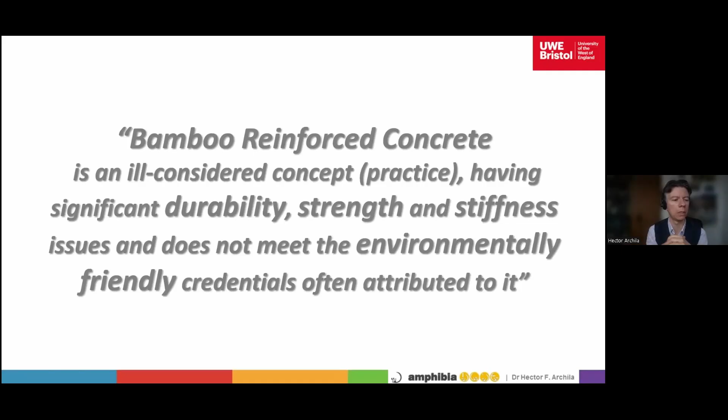It's probably a call to action to everyone participating in this event and all the people using bamboo, to stop using bamboo reinforced concrete. More details are available in that paper, and the video will go live on social media and other networks that INBAR has. So that's it for me.

Thank you. I believe Hector and Jan will produce more videos in coming years. Following this, we will have a new book release, the Bamboo Construction Manual for Single-Story Housing, produced by INBAR and the Base Bahia Foundation. Let's invite Luis Felipe to introduce it.

Hello everyone, thank you very much Kewei. Can you see my screen now? Yes, okay. As Kewei was announcing, we are very happy to share with all of you the new manual for construction of single-story houses made of composite shear walls. This is a collaboration between Base Bahia, INBAR, the Construction Task Force, and supported by the Hilti Foundation.

We have been working on this for the last two years. A lot of work has been done to make this manual possible, and you can see here the content. It discusses bamboo as a construction material, the pre-construction requirements of a composite bamboo shear wall house, the construction process, reference materials and standards, and some annexes.

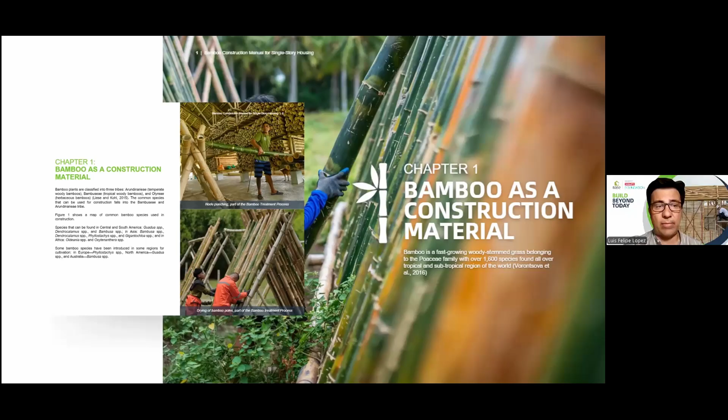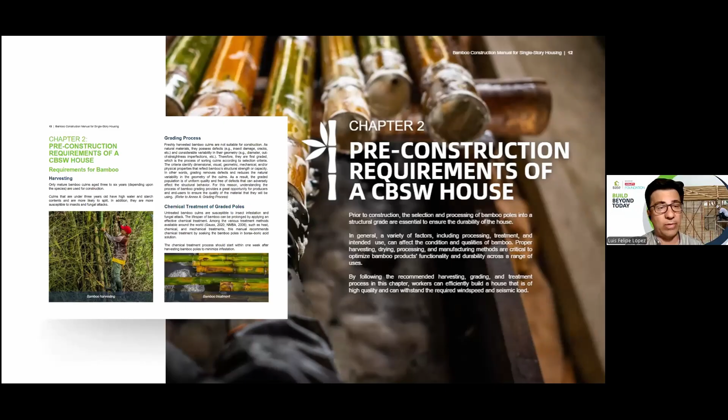In chapter 2, we present the pre-construction requirements of a CBSW house, and this talks a little bit about the treatment, the harvesting process, the grading of the bamboo, and the classification of the poles for construction.

Then we have an extensive chapter on how to build a proper house step by step, starting from the foundation of the house, the prefabrication of the walls, the installation of the components, the roofing components, and the finishes of the house.

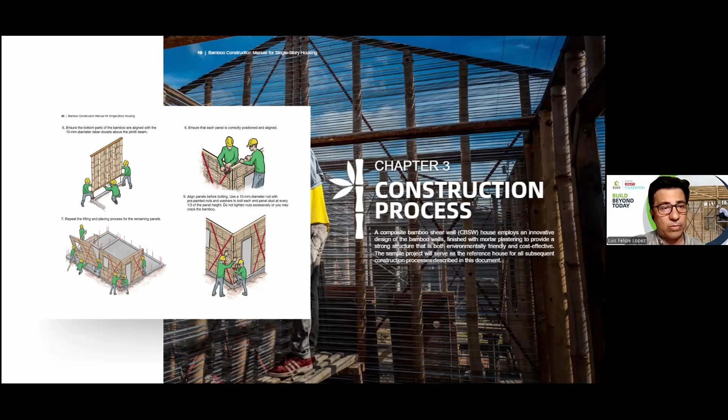It's a very detailed and comprehensive material that will allow many people around the world to build their own houses. At the end, in the annexes, we introduce a detailed house project that everyone can follow in their own countries, including the details for construction and foundation, and the prefabrication of the walls. It's a simple house that can be replicated, but also just a simple example to understand how easy it is to replicate this material.

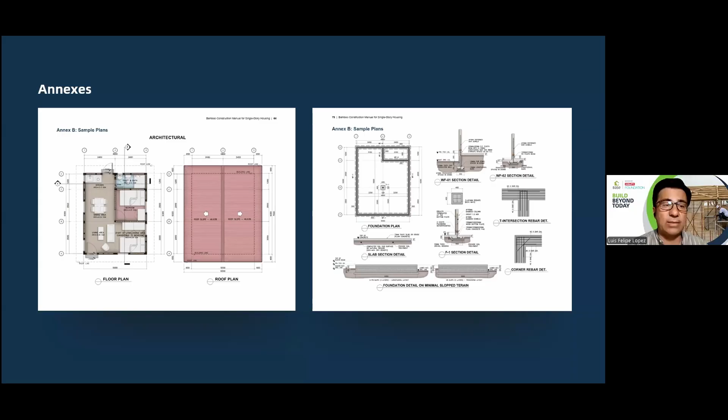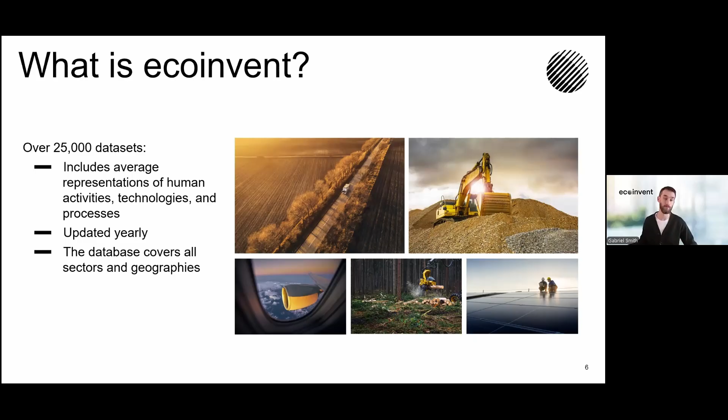If there were no dataset to use, they would just be guessing, and they might get it wrong. So if you want people to know that your material is more sustainable than a potential alternative, submitting data to EcoInvent is a very good idea. People trying to make their products more sustainable are using EcoInvent to compare different potential material sources.

So let's dig in a little bit for bio-based materials like bamboo. Bio-based means this is something that grew and then was harvested and processed. Agricultural crops and trees would also be examples. This is in contrast to something that has to be mined, like copper or iron.

When it comes to evaluating the impact of a bio-based material, there are unique considerations because the product itself contains carbon that was absorbed from the air and then turned into biomass. The way we handle this in EcoInvent is that the basic ingredients of carbon, energy, and water are represented as elementary flows. This represents the growth and photosynthesis of the plant as it builds biomass, in this example, the bamboo plant. Currently the water is contained within a wood flow, though we might change that in the future and represent it as an elemental flow by itself.

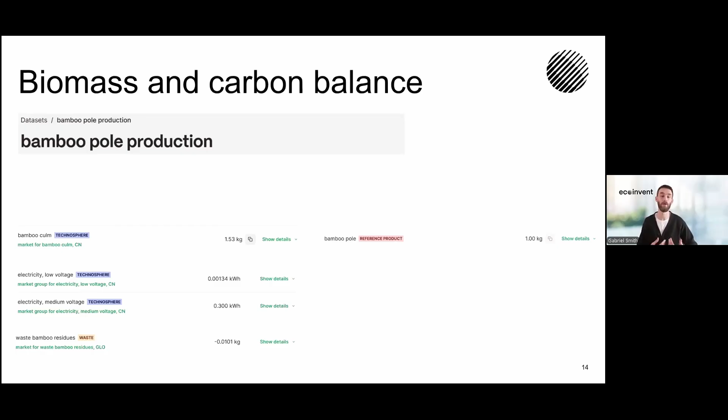Linking all of these datasets together enables us to assess impact using many different potential measures. So here, for example, using the IPCC 2021 method, we get an estimate of the climate change impact for this product. Specifically, this score excludes biogenic carbon flows.

That's the carbon that the bamboo plant is turning into biomass through photosynthesis. But there are other IPCC methods that include biogenic carbon flows. Specifically, inputs are counted as negative and emissions are positive. This is also called a -1+1 approach. And so in most cases, these should cancel out perfectly if you do an analysis that goes all the way from the beginning to the end of life for the product.

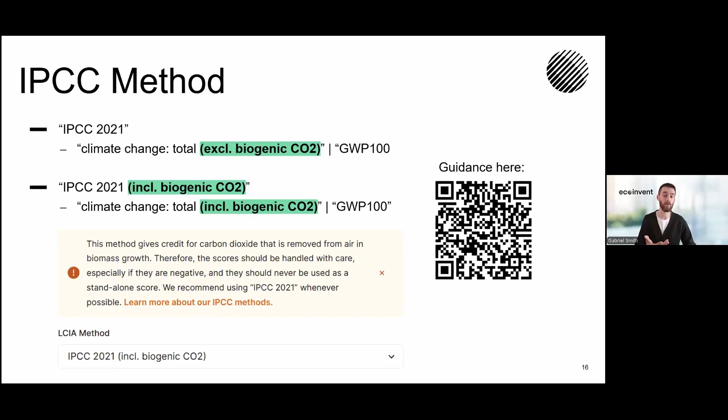But if you ever use this -1+1 method that includes biogenic carbon, or if someone else uses it and presents the results to you, you should compare those results to the ones that exclude biogenic carbon. And if the results are not the same, you should be skeptical and figure out exactly why they are not the same. There are a few cases where a difference is correct, but there are many where it would indicate that there's a mistake somewhere in the supply chain calculation, or you have an incomplete analysis.

So for example, if we include biogenic carbon flows for the bamboo pole dataset, we get a very different score for its climate change impact. And in fact, it's negative. As bamboo producers, we might be delighted to see this, but remember, we need to be skeptical if results differ from the other method.

So I wonder, can anyone tell me why the score is negative here? Does anybody have any ideas? You can just unmute and say something if you've got some input here. Nobody knows why the score is negative? I'll tell you if you don't know, but if you have some ideas, this is good too.

So the score is negative because our analysis does not include the end of life for this bamboo pole. We know the pole is going to disappear at some point. It's not going to last forever. And it could be misleading if we measure its impact assuming that it will. So it's important to proceed with caution if you ever use these include-biogenic-CO2 scores.

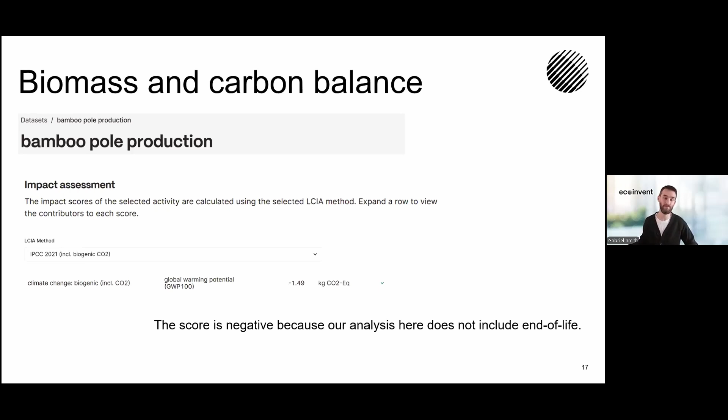In conclusion, these are the three takeaway points I want you to remember from this presentation. First, if you want people to know what the environmental benefits and impacts of your materials are, submit data to EcoInvent. Second, if you want to follow flows of carbon or other elemental flows through a bio-based product's supply chain, you can examine the properties and the elemental flows. And then finally, check results really carefully if you are doing impact assessment, especially around biogenic carbon flows.

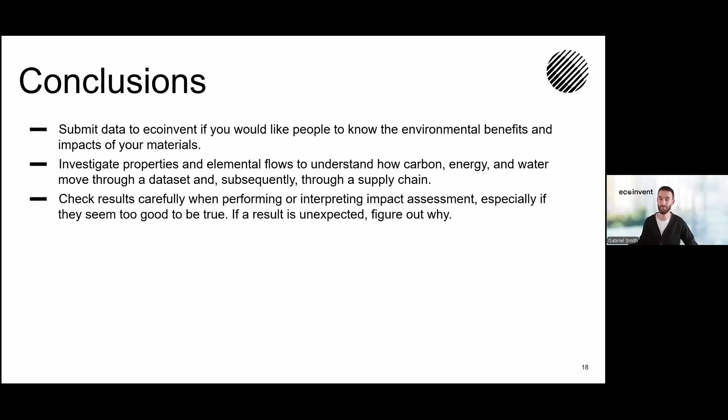Thank you. Thank you, Gabriel. Great presentation.

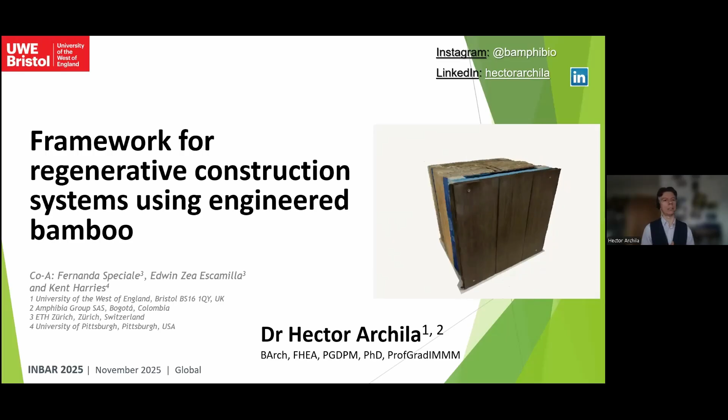It's a little bit of results from all that wonderful collaboration and that wonderful work that we do at our places of work, but also with INBAR and as part of the task force for bamboo construction, which aims to disseminate knowledge and raise awareness of how you can better use bamboo, and what are the latest developments in bamboo research. So what I'm going to tell you about is this latest work we have been developing, and it follows quite nicely from what Gabriel was saying in terms of LCA analysis.

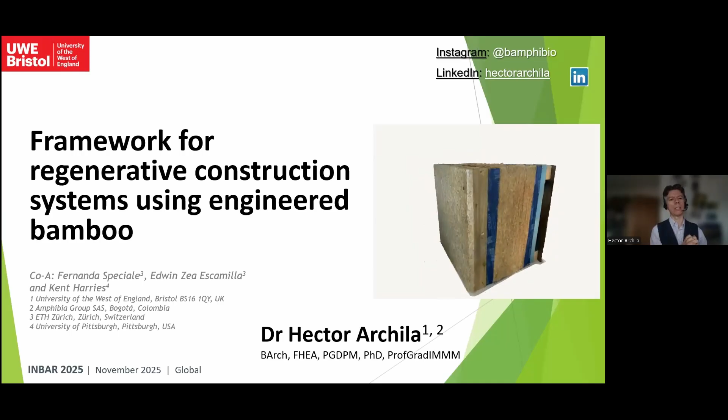Because what we are actually saying is it's really good to do the LCA analysis. We do need it, we do need to use it, but perhaps we need to also look at other impacts that construction and the use of materials have in construction and in the planet, in the global context. So you can see there some of the authors of a paper we published recently. You've got Fernanda Speciale from ETH Zürich, Edwin, who is here too, and we've got Kent Harries also from University of Pittsburgh.

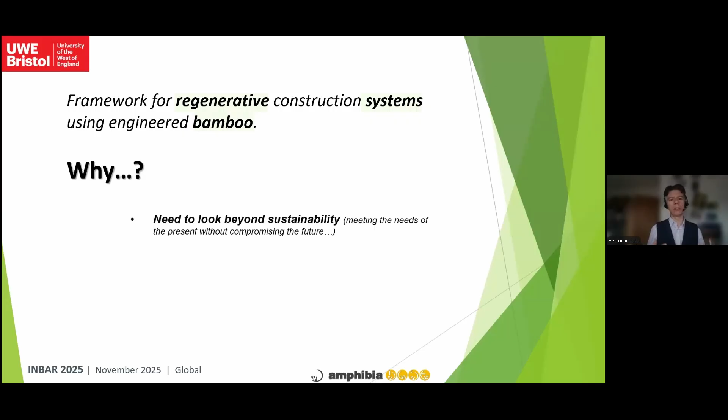So let me just tell you why creating a framework of regenerative construction and why using engineered bamboo. I guess the clues are in the title. We need to look beyond sustainability, and that's what regenerative construction, regenerative design is about - looking at not doing harm, because being sustainable is not enough. We need to look at how we can enable living and human systems to survive, thrive, and co-evolve, and how to repair the damage that we have caused already.

We know that human activities have created huge damage on the environment and on the planet. In construction, we have focused a lot on financial gain, and lately we have become a little bit carbon centric, so everything is put in terms of carbon. So we need to look at construction perhaps as a systems, in a systems thinking way.

And that means, and that we have done, is looking at construction in a systemic way, and at the impacts that construction has in a systemic way. So basically, it's something similar - to simplify it a lot.

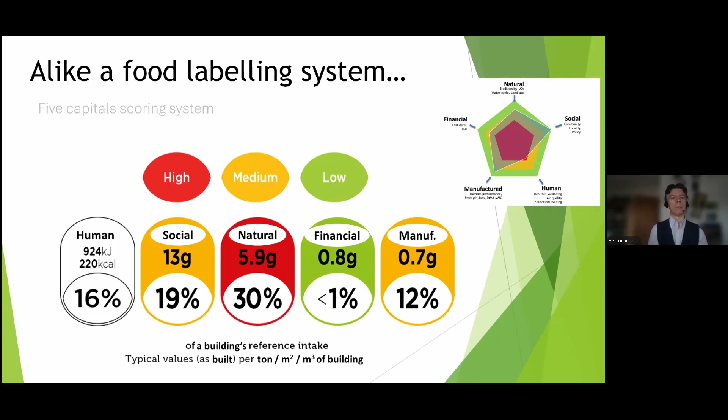So what we have done, and what we're going to explain a little bit more in this presentation, is how we developed that human, social, natural, financial, and manufacturing scoring system, which is very similar to a food labeling system in some places - where if you look at some food products, you will find a labeling system that says this contains this much sugar, this much fat, salt, carbohydrates, etc.

So we are doing something similar for a series of systems that we develop. I'm going to concentrate on only one system, but I'll show you more in a few minutes, where we have used, for instance, mainly fast-growing materials, and we have created a whole system of construction, and we have evaluated those five impacts on each of those systems.

This is one of them: a fast-growing bio-based system, a timber and bamboo bio-based system, and a passive house bio-based system, because we wanted to compare these systems that we have created with the best sort of standard available, and with traditional construction, at least in the United Kingdom, where of course we have seasons and the way we build is a bit different. You need more insulation, and it's a bit of a different system. So what I'm going to be showing you in this presentation is a problems and solutions approach, and the solutions, of course, address systems. But then let's start with the first problem.

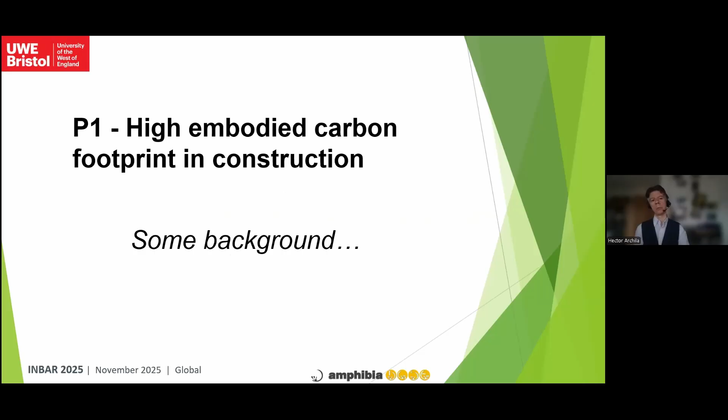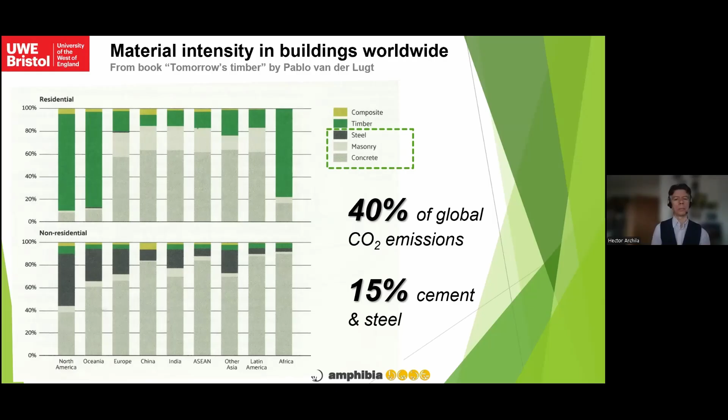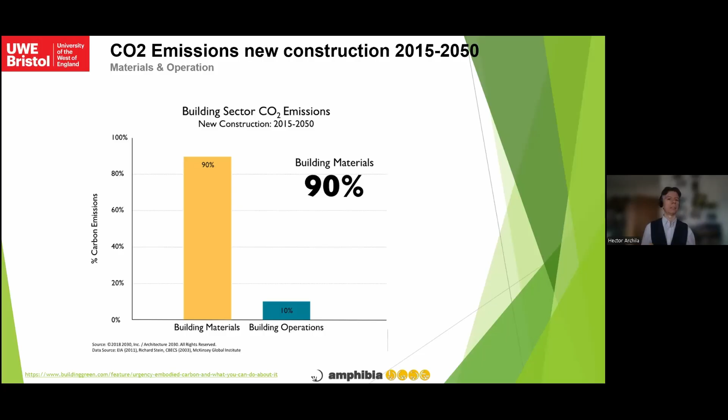We do know that the construction industry has a high embodied carbon footprint. And when you look at the global emissions of construction, we know that construction emits about 40% of all global CO2 emissions. And we are very dependent, almost addicted, to two materials, cement and steel. Steel and cement account for 15% of all global CO2 emissions. So that's very concerning, and you can look at that graph to see how reliant we are on those two materials. That creates a problem for the future, because as we become much more efficient in terms of energy use, and we decarbonize electricity across the world, the problem in the future will be materials, building materials, not so much the energy, but the embodied carbon in those materials.

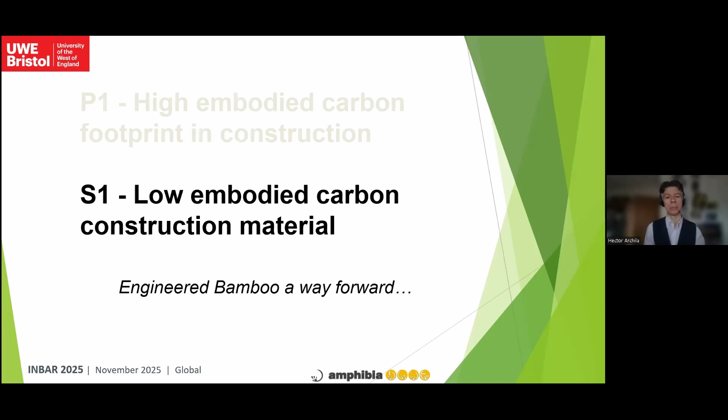So, of course, a solution to that is using bamboo, and engineered bamboo is of course a way forward. This is work that we have done actually with Edwin here and with Guillaume at ETH in Zurich. And we looked at what happens when you build with round bamboo, and what happens when you build with engineered bamboo in one-story or multi-story buildings.

And we compared that to brick construction and to concrete block construction. Of course the values are unsurprising. If you build a single-story house with round bamboo, your carbon balance is negative, and of course you need to listen carefully—you probably heard from Gabriel that you need to be careful with the boundaries and how we analyze those carbon emissions. But you can see from the comparison how the single-story house of round bamboo has the lowest carbon emissions. And if you use engineered bamboo, you also have a very low carbon emission, almost negative carbon emissions, compared to brick and concrete.

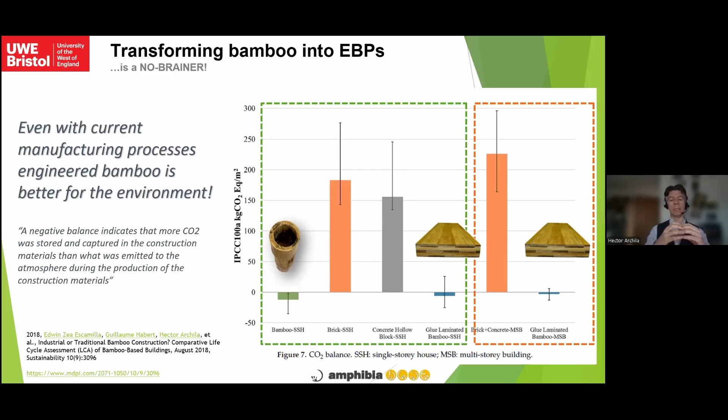And of course it makes sense to use engineered bamboo in places where bamboo doesn't grow, because you're not transporting air around the world—you're transporting a ready material to be used in construction, a material that has been engineered. So you would say that using engineered bamboo is a no-brainer. We can engineer the material to respond to the structural needs that you have. It has a low carbon footprint. And again, as I was saying, if we transport it internationally, you won't be transporting air as happens with a round cane of bamboo—it's mostly air, really.

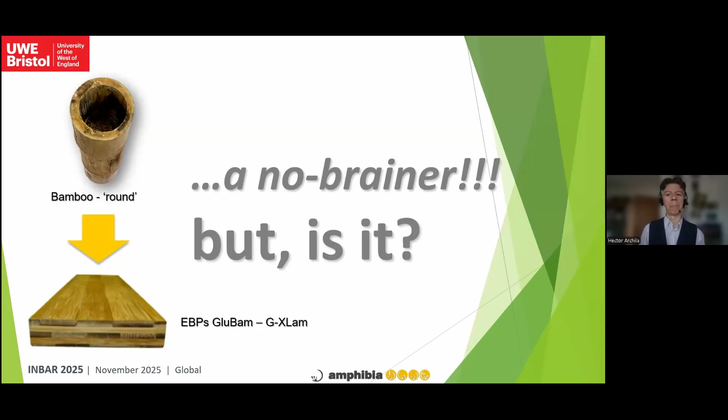So the problem really that we have with engineered bamboo—and I'm doing a quick recap of some of the experiences we have had developing engineered bamboo products and making them competitive—we realize that at present doing something with engineered bamboo is very expensive. If you compare the prices of engineered bamboo for structural products, they're about 5 times more expensive than a cross-laminated timber product, which we are using more and more in Europe, the US, and other parts of the world. These prices are from around 2024, so you need to adjust them now for inflation, but more or less they are 5 times more expensive for engineered bamboo products. So that's a big problem—not having a material that can be competitive with other bio-based materials available.

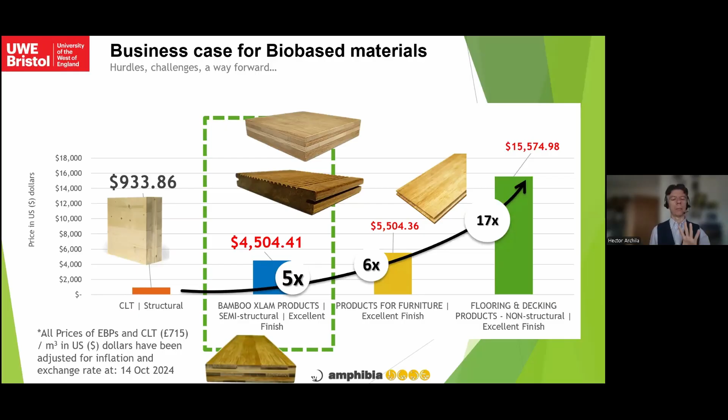And we know that bamboo has many, many benefits. So in terms of that, something we have been doing is innovation with engineered bamboo, and to do that we realized that you don't need engineered bamboo products that are only bamboo. You can mix bamboo with, say, timber of low grade, and wood species to which we don't add much value. Because at the end of the day, a lot of what we need in engineered products—if you have a strong material like bamboo that has been laminated and engineered—really what you need is something to fill the gaps and to distance the main load-bearing layers in an engineered bamboo product.

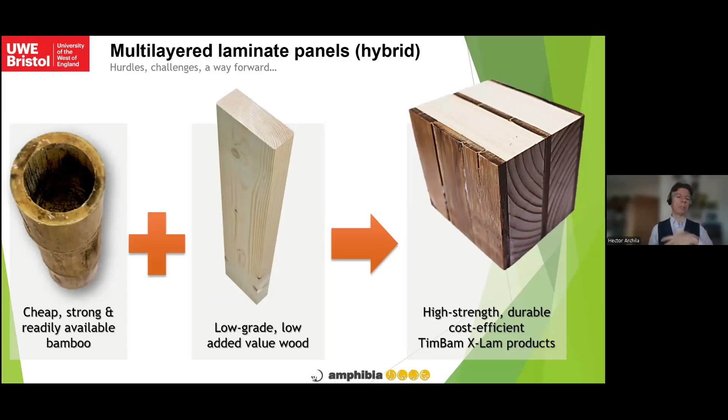And we've done a lot of work on this. We have done all the mechanics, all the engineering of this. You can scan the QR code to find more, or just Google my name and find some of those papers.

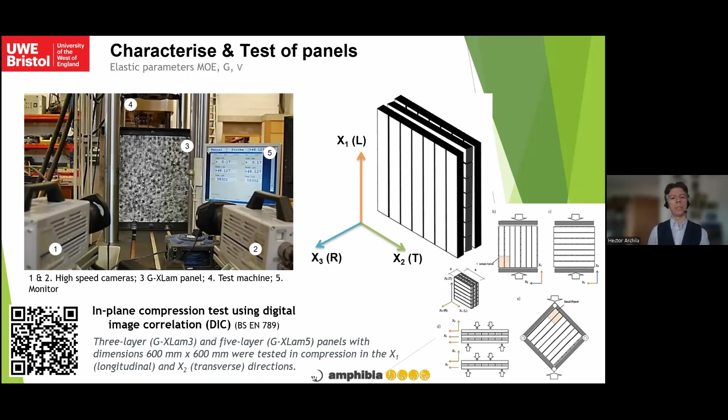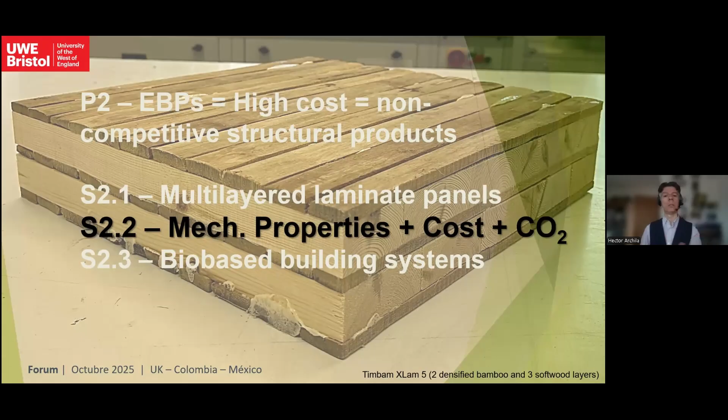So we have done all of that to demonstrate that you can have a material with high mechanical properties that can be competitive and that can have a very low carbon footprint. And this is along the lines of developing technically, environmentally, and economically viable products.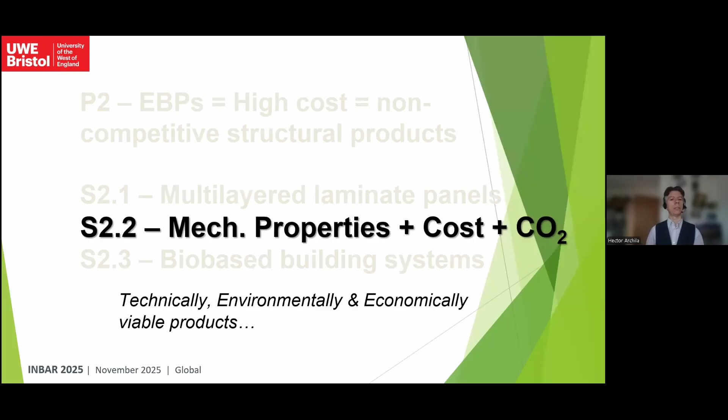You can see from these results how, if you compare to the products I mentioned, the cross-laminated timber products of 5 layers, the CLT5 - if you compare the modulus of elasticity of a 5-layer CLT product with a timber and bamboo hybrid product of 5 layers, we can achieve higher modulus of elasticity with a cost difference that is, I think, about 15% higher.

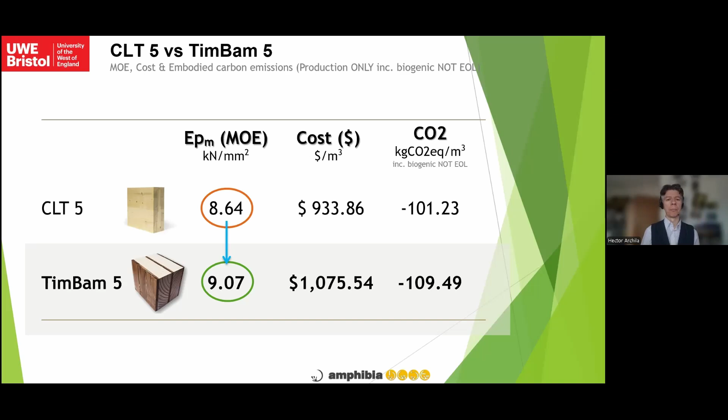And then when you analyze the CO2 - this is not including end of life - you can see that biogenic carbon footprint is much lower too. Of course, it's a factor of 15, 1.15, which is much higher, but is still within manageable.

cost in construction. You would say a client will probably pay 10 to 15% more for a product that has more benefits in construction. And of course, that depends on what type of structural construction we're talking about.

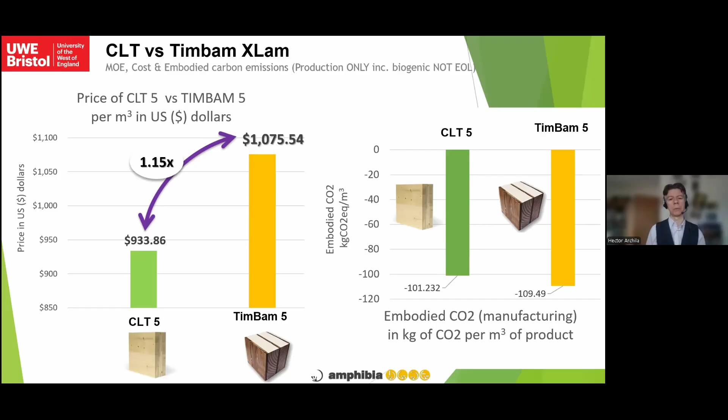So from these, you can see that we have a material that has the potential of being structural, of being feasible for structural applications, also economically viable - a material like those timber bamboo engineered products that also provides us with a low embodied carbon footprint, at least from the manufacturing perspective. We haven't done all the life cycle analysis, but we know that from the embodied CO2, when you compare it to other products, we have a very low embodied carbon footprint.

So then we need to move forward and think not only of materials, but also of systems. How do we integrate those engineered timber bamboo products into real construction systems? Because standalone products won't sell themselves, and I have gone through a very long journey of finding and creating business cases for these types of products, talking to many people in industry.

And we do know that you require systems - materials that can play along with building systems, and that's what we have done with those systems I showed you at the beginning. So we have created what we call a fast-growing bio-based system, which includes walls, floors, and roofs, which use materials that take between 5 months, like hemp, and 6 years, like bamboo, to mature and be ready for construction.

And with the right processing and the right detailing, you can use them for long-lasting construction. And that's what we have done there.

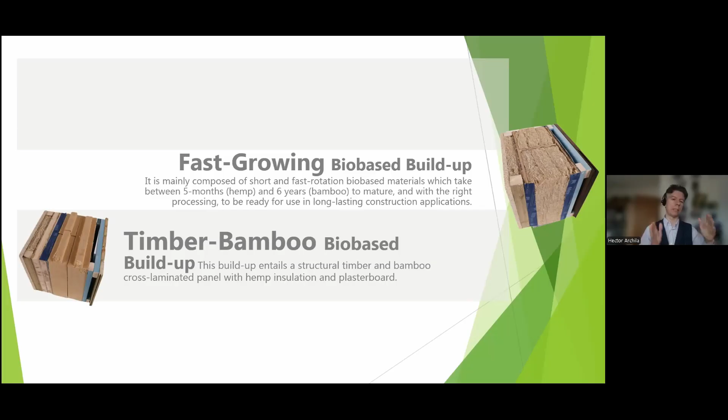We have done the same for hybrid timber and bamboo systems, where we have, for instance, a very thick wood fiber insulation, and a timber bamboo panel that provides the structural integrity, with other materials that provide the internal lining and the external cladding for those products.

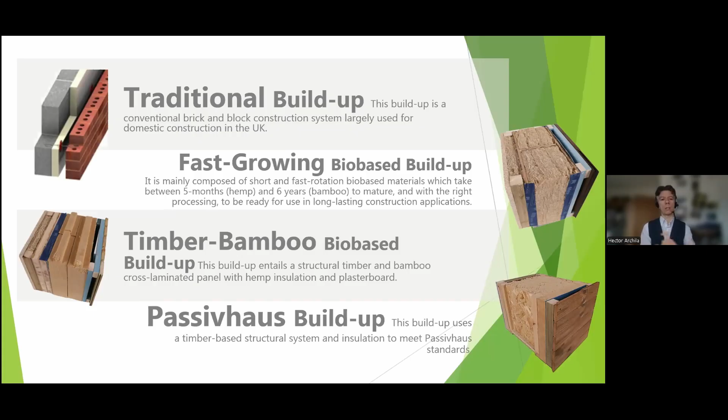And of course, comparing with best practice, with Passive House standards, we compare that with a bio-based, fully bio-based, mostly timber-based construction system, and also we compare these systems to a traditional construction system, at least for the United Kingdom. So let me show you one specific system and the results from our work, and what the results from the framework are.

So this is a timber bio-based system for domestic construction. You can see there, number one is our structural component, the timber and bamboo material, the timber and bamboo product. Then you have that thick wood fiber insulation, separated by a breather membrane that is necessary in this type of construction, necessary in these latitudes.

And then internally, you have the plasterboard, that is a hemp-based product, and externally, to the right-hand side of your screens, you will have the cladding. And the cladding that we use here - actually, I just realized there is a mistake there. But the cladding, no, it's external wood cladding. No, that's completely correct.

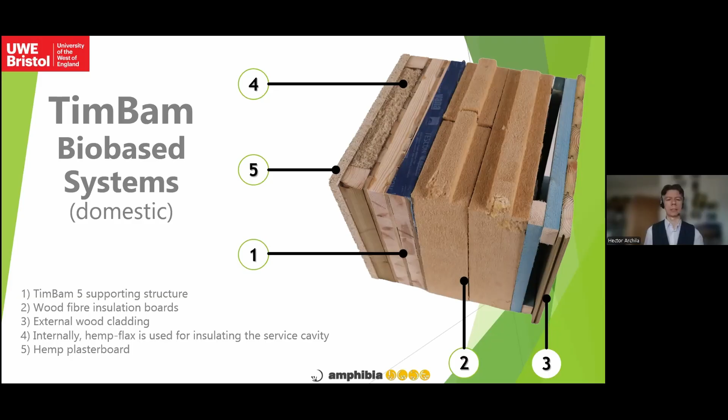And we have, for instance, another fast-growing bio-based system with an engineered bamboo I-joist with hemp flax insulation, hemp plasterboard, and a thermally modified bamboo cladding on the exterior, provided by Moso International, a company that produces and distributes Moso products in Europe and internationally.

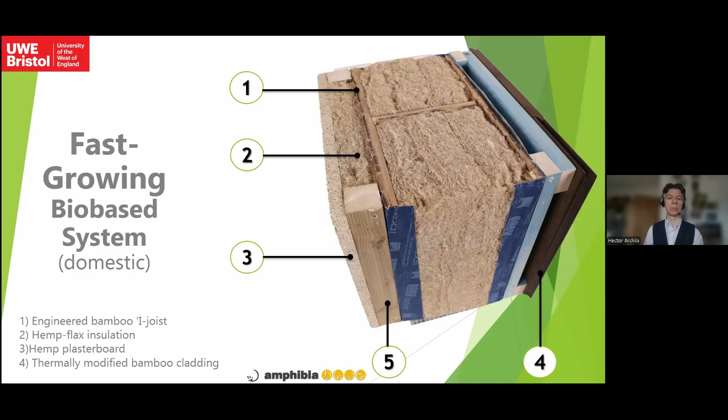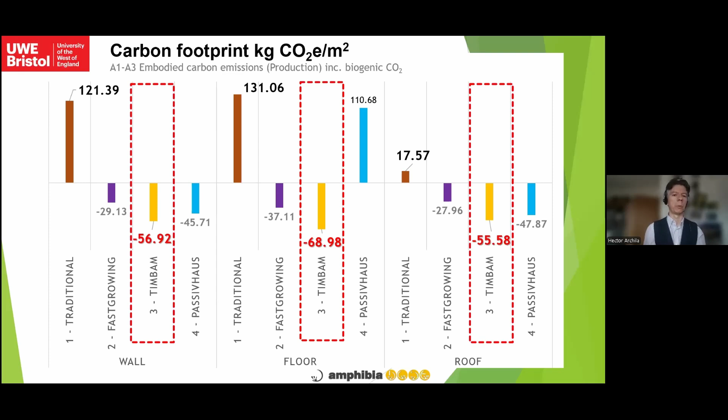From that, this is sort of a summary of the results. You will see a lot of graphs like these, where we compare all the results that we have. When you look at the manufacturing impact, the natural impact, the financial impact (that's cost), the human impact and the social impact, you realize that the engineered bamboo system solutions have the best scoring in terms of all these parameters.

So we are looking at parameters, not only carbon, which was the only one I showed you there, but we are looking at a whole compendium of factors.

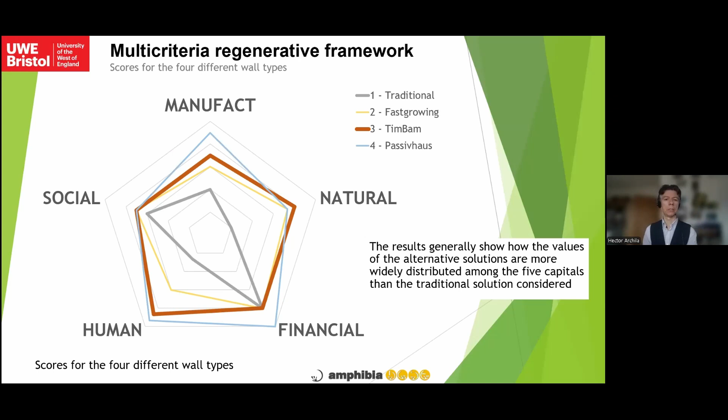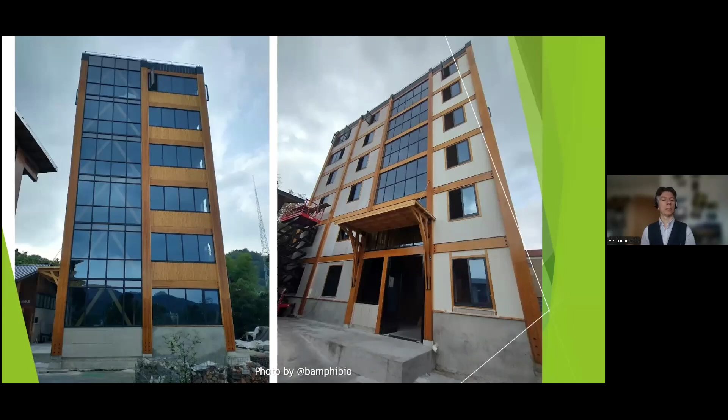Of course we can extend more on that, but it's probably best if you have a look at what we've published, because at the end of the day, what we're looking at is the future, and the future is probably those multi-story engineered bamboo buildings, like this one in China by Professor Yan Xiao, which has been built recently. It's a six-story bamboo building using engineered bamboo, and it demonstrates that it's possible, and with good detailing and good specifications, we can get there.

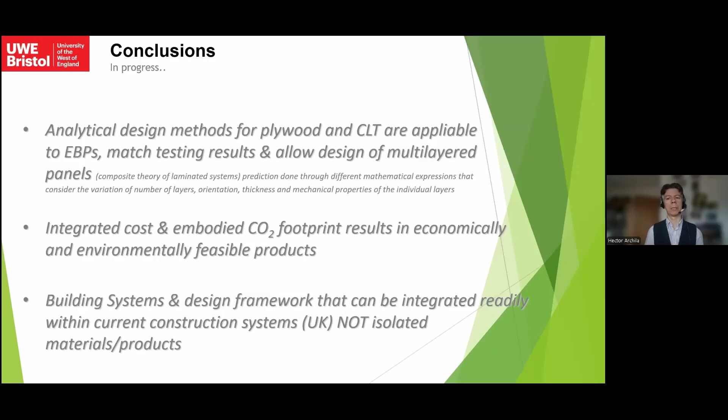So in conclusion, I've probably taken more than the time allocated, but these are the conclusions. Basically, what I wanted to tell you is we should look at construction in an integral way, and all the impacts that construction can cause from a human perspective, health and well-being, from a cost perspective, from an environmental perspective, looking at biodiversity and CO2 footprint, and from a technical perspective also, which is that manufacturing value I was telling you about.

If you want to know more, this QR code can give you more information about the work we are doing, and I think that's all I had. Sorry for taking a bit more time than I should have.

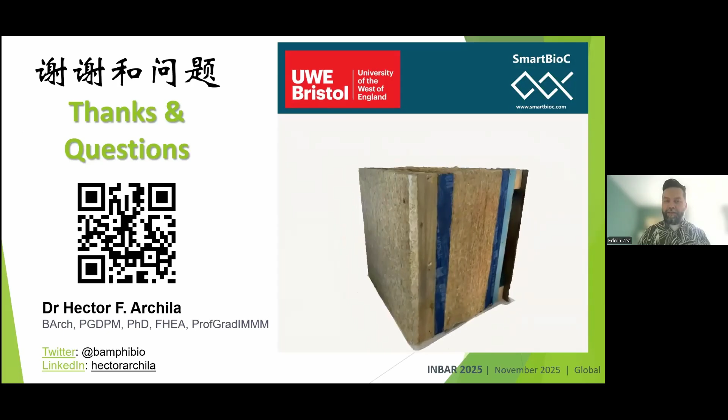Thank you, Hector. No problem. We are good on time. Maybe we can get a quick question now, and then we leave the rest for the Q&A. No one? Okay.

Let's move on, it's a real pleasure for me now to invite Kewei Liu from INBAR, a dear colleague I've been collaborating with at many different levels, especially on this work she's now leading on life cycle assessment of engineered bamboo, which Kewei will share today. She has a long experience working at INBAR as project manager, and is also a convenor for the ISO TC 165 working group 12. She's been very involved in the development of the ISO norms that, with support of the Construction Task Force from INBAR, have been developed over the past decade. Now she's also taking the baton and working on life cycle assessment of materials and buildings. Today, Kewei will share with us her work on life cycle assessment of structural glue laminated bamboo. Kewei, please, the floor is yours.

Okay, thank you. Thank you for your introduction. I will share my screen. Can you see my screen now? It's not yet in full screen. Okay.

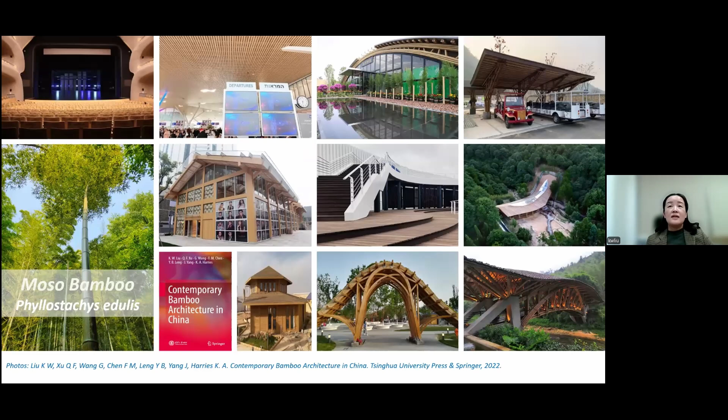Glued laminated bamboo is one of the most commercial products used around the world. In recent years, it has been used in permanent structures, as Hector showed to all the participants here. In China, Professor Yan Xiao already constructed a glued laminated bamboo structure, combined with other engineered bamboo products, into 7 stories. So it really has great potential for commercial markets.

Bamboo absorbs carbon dioxide by photosynthesis, and when we harvest it into bamboo culms, we can produce bamboo strips after sizing, compression, and lamination technologies. These can be produced into structural glued laminated bamboo, which can be used as beams or columns in permanent structures, lasting more than 50 years.

Bamboo in the forest, when it grows, absorbs carbon dioxide to store biogenic carbon in itself. During the manufacturing process, because of the inputs of other materials and energies, it also emits carbon dioxide. When we use the products as permanent components in structures, the biogenic carbon can be stored there until the end of life of the structure. Depending on the different treatment of the products, the carbon storage and carbon emission are quite different.

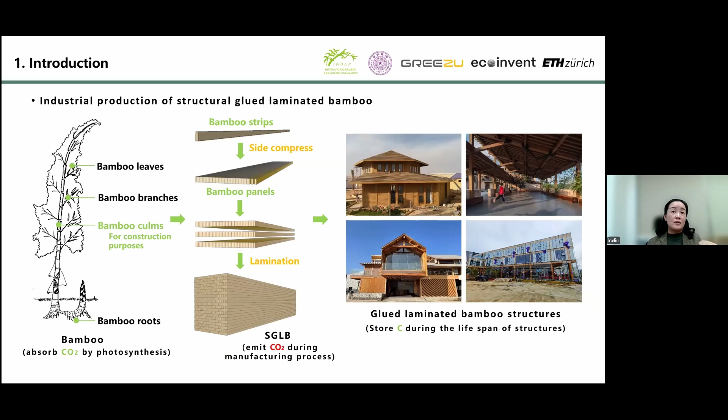For this process, we really want to know how carbon cycles during the entire lifespan of a structure. We also want to quantify how much carbon can be stored per cubic meter, one functional unit of these products, and how much carbon will be emitted during the whole manufacturing process.

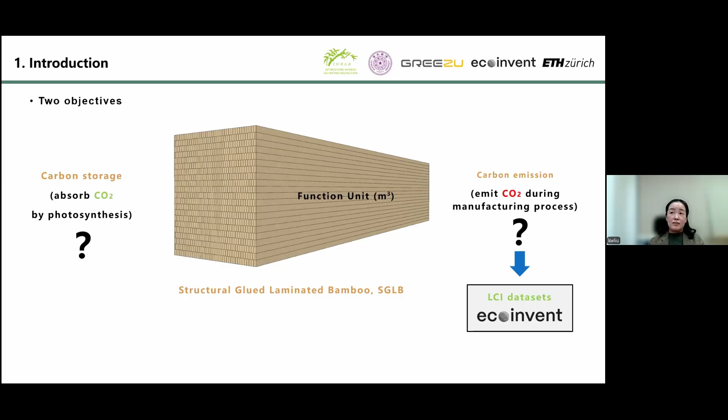Currently, we already have the life cycle inventory of these products. Edwin and I are preparing the submission to ecoinvent. We are working very closely with Gabriel Smith and Olivia currently.

Let me introduce the system boundary of these products. For our research, we set up a cradle-to-gate boundary for it, including 4 phases: bamboo growing in the forest and bamboo harvesting, production of fine-planed bamboo strips, and the final products production.

Because the boundary is from cradle to gate, we also exclude some carbon emissions. For example, the end-of-life carbon emission, if we burn those structural components at the end of life, we cannot calculate currently. We also exclude the land use change before bamboo planting, and we exclude the carbon emission due to the burning of bamboo co-products and biomass fuel in the factory, because we treat them as balanced carbon.

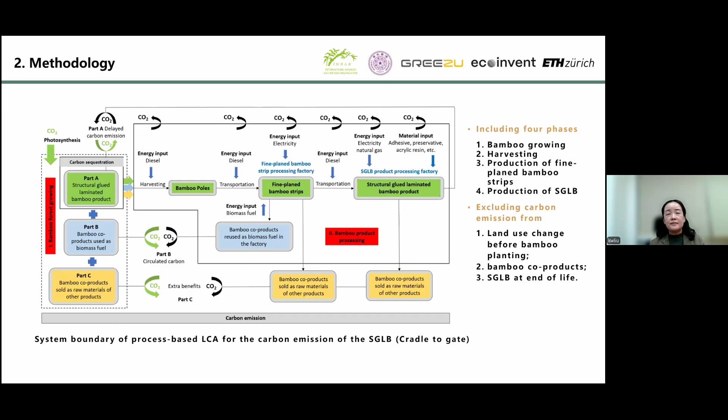This basic research was really very tough. It was also the first time for me to carry out detailed field investigation and experiments in the factories. We spent over 1 year, took 3 field investigations to 6 manufacturers, and interviewed 5 enterprises for validating data.

Let me introduce how to calculate the carbon storage of these types of products. Based on the calculation method developed by CEN for timber products, we developed our own equation to calculate its carbon storage, according to its own characteristics and considering material loss in sanding and sawing processes.

There are lots of parameters we need to determine during the experiments and records of manufacturing. We need to find out the density of the products, the moisture content, density of 2 types of adhesives for both hot and cold compression, as well as the weights of adhesives for hot and cold compression, and how much bamboo strips we need to produce 1 single panel, and how many panels we need to produce 1 cubic meter of these products.

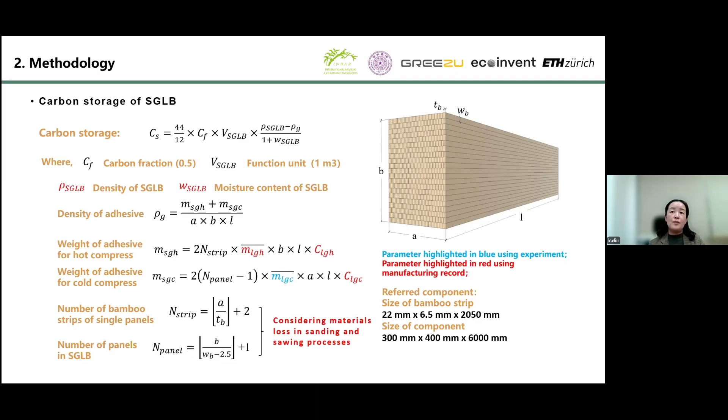First, we measured 72 samples of full sections, cut off from commercial products, from those purlins, rafters, or columns. We got the average density of these products at around 680 kilograms per cubic meter, and the moisture content at 7%.

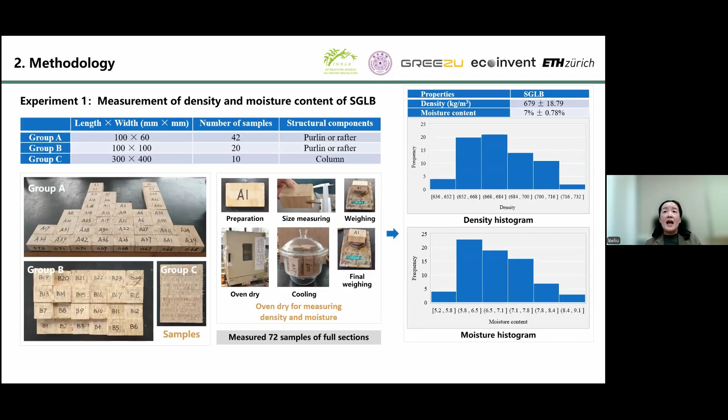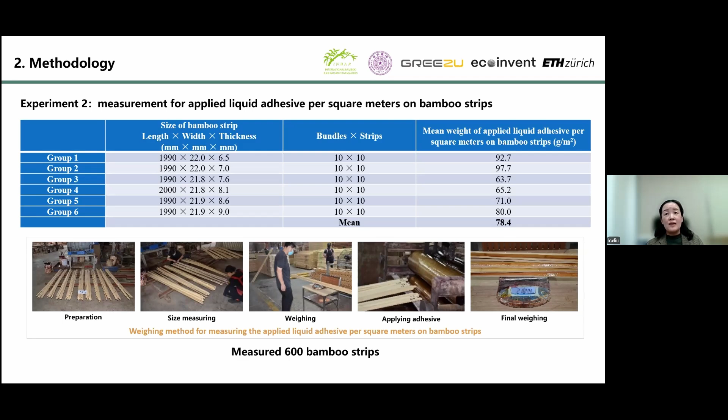Second, we measured 600 bamboo strips to get the applied liquid adhesives per square meter on bamboo strips for hot compression. For the cold compression, the data was obtained from the manufacturing record. We also needed to get the solid contents of the 2 types of adhesives by experiments in the factory.

Let me introduce the entire manufacturing process. You can see from this slide, actually there are almost 30 different manufacturing processes.

Required for the production of these products, from the bamboo growing in the forest, cutting them off and cutting them into bamboo culms and splitting them. After the rough planing machine, we set them into the caramelization boiler to get rid of starch. After 2 turns of kiln drying, we processed them into the fine planing machine and have the automatic selection, and we could get the fine-planed bamboo strips.

Fine-planed bamboo strips are also provided to produce other bamboo products, not only structural glue laminated bamboo products. So once all the fine-planed bamboo strips are transported to the structural glue laminated bamboo processing factory, we need to prepare the finger joint hooks.

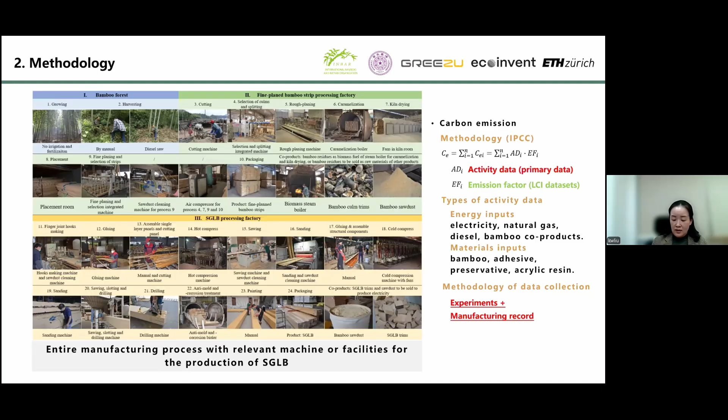Let me introduce a little bit about how to collect and calculate the quantity of consumed electricity, because for this product, more than 70% of the carbon emission is caused by electricity. So we need to carefully check each process which requires use of machines.

For example, for rough planing, we measured 12,000 strips. They need to deal with 12,000 strips in 9 hours, but 1 cubic meter of products only needs 4,200 strips. So we need to have the equivalent calculation for each step.

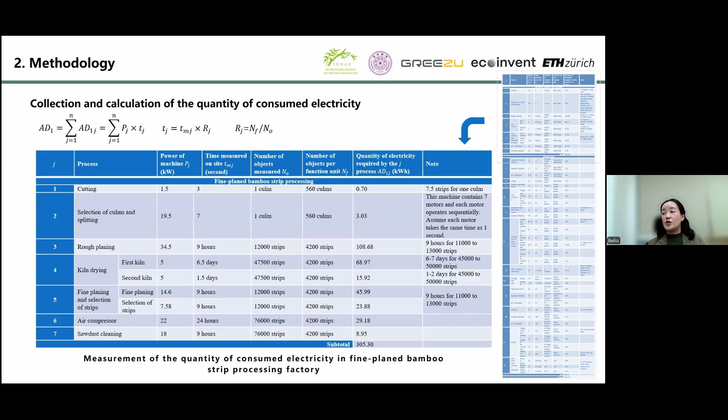We really have a very long list to calculate them, and all the detailed information is provided in the journal appendix you can figure out.

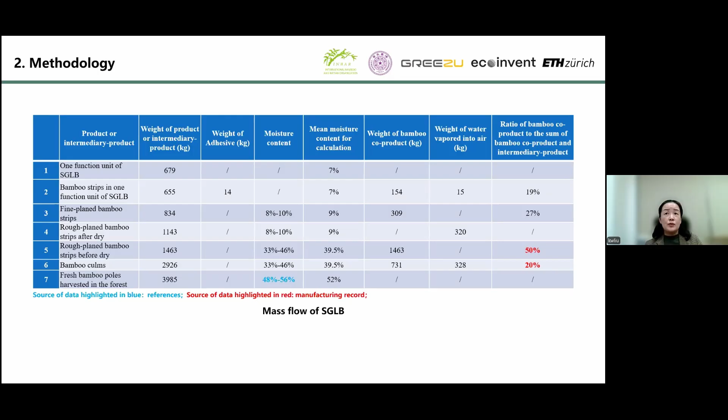To produce the mass flow of this product is also very important for us to understand how bamboo, the weight of bamboo, and the moisture content change during the whole process. So it's very important for us to use this mass flow to produce the life cycle inventory.

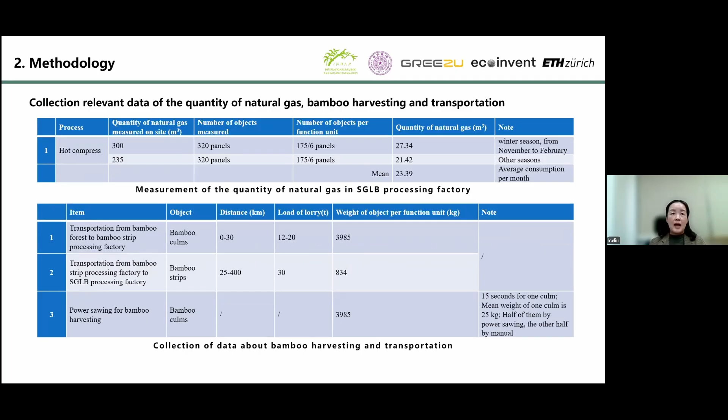As I introduced, we also need to collect relevant data of quantity of natural gas, bamboo harvesting, diesel, transportation, as well as all kinds of material inputs.

So after the completion of getting all the required data, we can calculate the carbon storage of these products. You can see these products, 1 cubic meter can store 1,140 kilogram carbon dioxide equivalents.

And we also could get the life cycle inventory for the details, including co-products, fuels, and material inputs for the production of these products.

So we use uncertainty analysis of Monte Carlo simulation based on the triangular distribution and uniform distribution. And we also use the emission factor of the version EcoInvent 3.10 for this journal's calculation. Actually, we could use the latest version 2024.

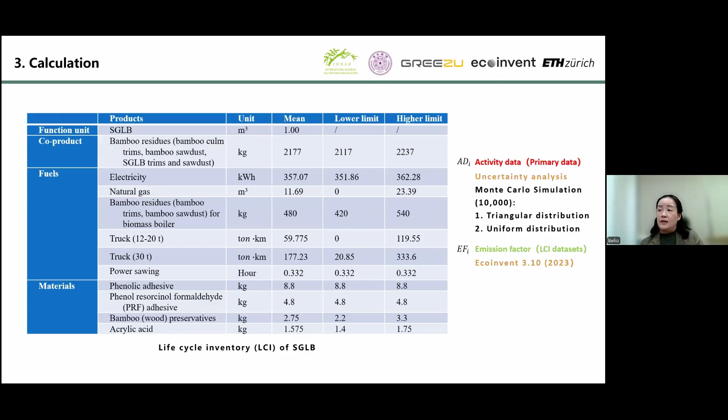The carbon emission of the products will decrease because the electricity emission factor decreased as well.

So after the Monte Carlo simulation, we could get the mean value of these products produced in Jiangxi province, which is located in central China. And the average carbon emission is around 460 kilogram.

Carbon dioxide equivalents. So do you remember that it can store 1,140 kilogram carbon dioxide? It means that from cradle to gates, the carbon storage is more than twice the carbon emission for these products.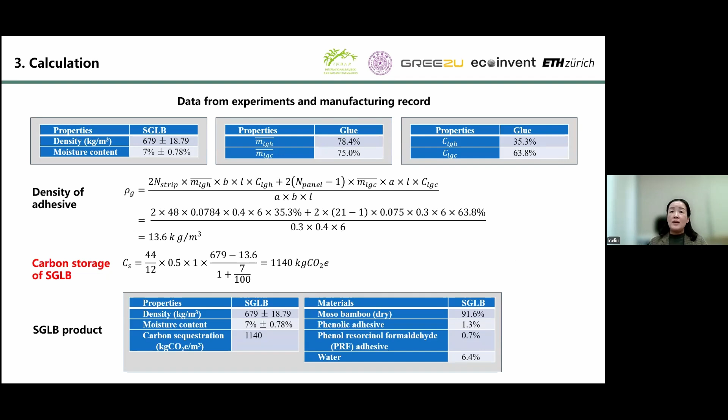It really has great potential to help us reduce climate change. We also analyze...

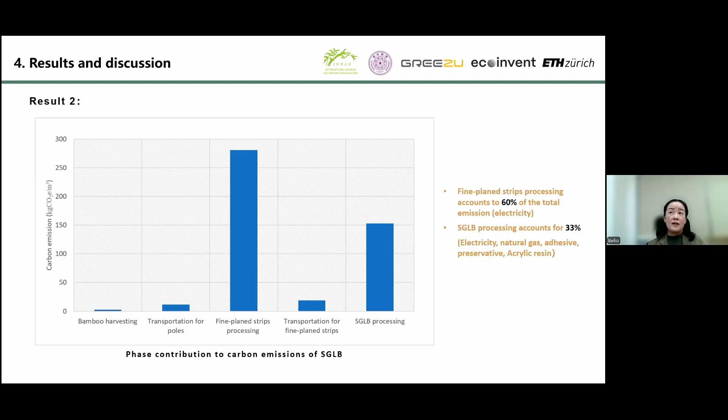...the phase contribution to carbon emission of these products. You may find that for fine planed strips processing, it accounts for 60% of the total emission, due to the consumption of electricity. Also, in structural glued laminated bamboo processing factory, it involves all types of other energy and material inputs like electricity, natural gas, adhesives, preservative, and acrylic resin. It only accounts for 33% of the total carbon emission. From the top 10 process contributions to carbon emission, you can find rough planning, kiln drying, fine planning, and selection of strips, and two types of resin, ranked the top 5.

So from the perspective of how to reduce carbon emission, we could suggest manufacturers consider reducing carbon emission from the top 5 processes.

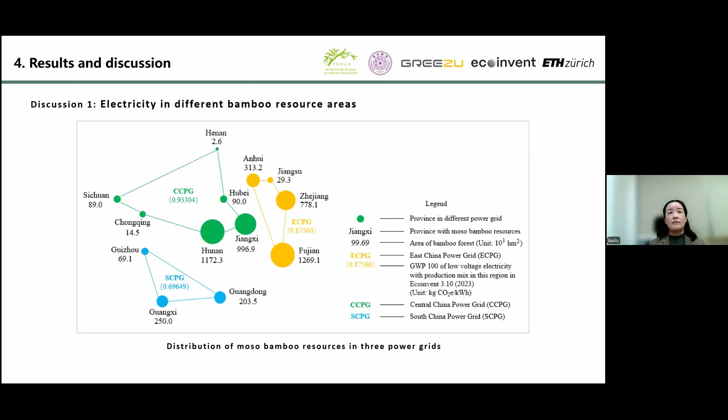For the journal, we have 3 very interesting discussions. The first one - I don't know whether you know well about the distribution of bamboo resources in China - there are lots of provinces located in southern China that produce the most bamboo. Those provinces belong to different power grids. According to EcoInvent's database, they divide the electricity provided into different regions. So we combined electricity provider data with different bamboo resource areas. We analyzed production of these types of products in different regions - central China, east China - as well as the average.

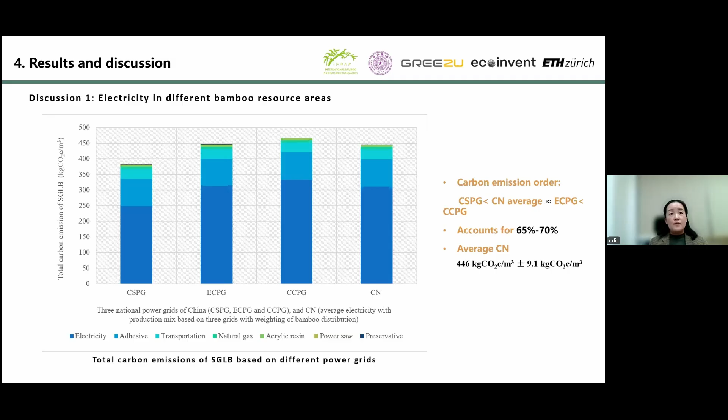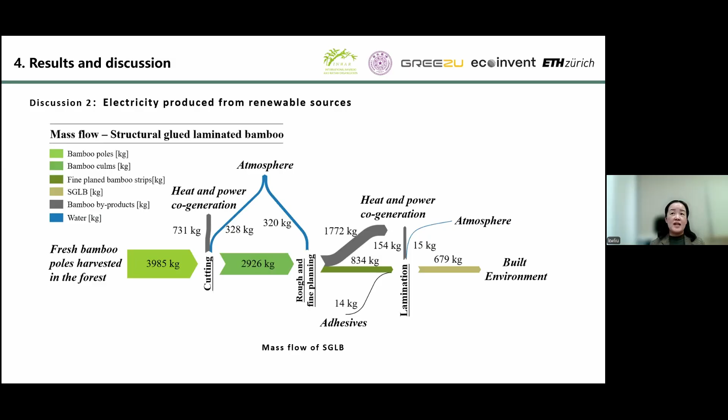The second discussion: because of the higher electricity consumption, we considered whether we could use innovative heat and power cogeneration technology, which is popular and widely used in European countries. This kind of technology can really help reduce carbon dioxide emission. By using heat power cogeneration, the carbon emission can be reduced from 460 to 150. So emission by electricity is only 23 kilogram carbon dioxide equivalent per cubic meter, counting only 14% of the total emission. In the future, we can recommend manufacturers purchase electricity produced from local green energy sources if they have the need to reduce the carbon emission of their own products.

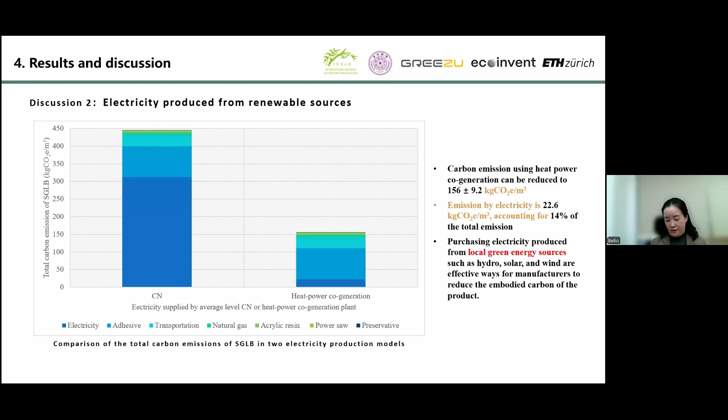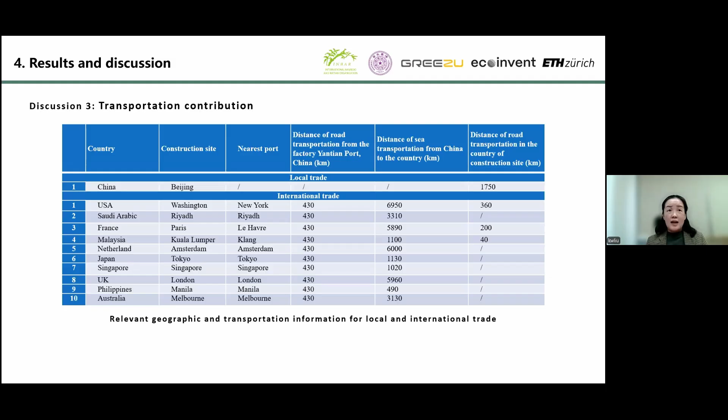The third discussion: we calculated the additional transportation after the factory gate. We assume this kind of product can be sold to different cities in different countries around the world - the USA, European countries, the Philippines, Australia, UK, Japan. We compared the contribution of road transportation and sea transportation. We assumed we transport this product from central China to Beijing, a distance less than 2,000 kilometers, only by road transportation. You may find the results very interesting, because the carbon emission to transport this product to Beijing is the highest one, compared to transporting it to any other cities around the world. Even transporting it to Washington is lower than transporting to Beijing, because the carbon emission factor of sea transportation is only 1/10 of that of road transportation.

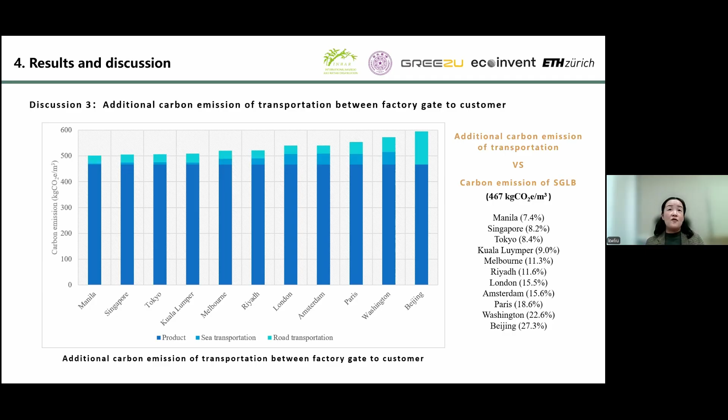So actually for carbon emission life cycle assessments, there are lots of items we can figure out. Now I'll give the conclusion for the research we have done. We developed the methodology to calculate the carbon storage and carbon emission of these products. Most importantly, we collected primary, reliable data of life cycle inventory for these products by using experiments and field investigations. We also calculated carbon storage and carbon emission for these products, and carried out 3 very interesting discussions.

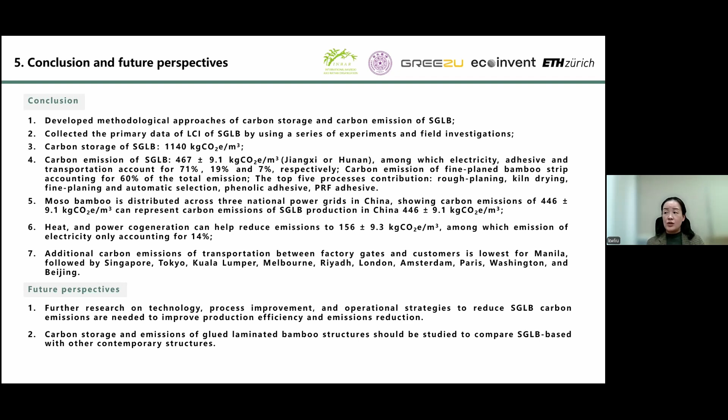Currently we completed this work by the end of last year, and this year we are mainly focused on research comparing carbon emission and carbon storage of glued laminated bamboo structures to other 3 traditional structures like glued laminated timber structure, steel structure, as well as concrete structure. We are looking forward to further discussion with all of you.